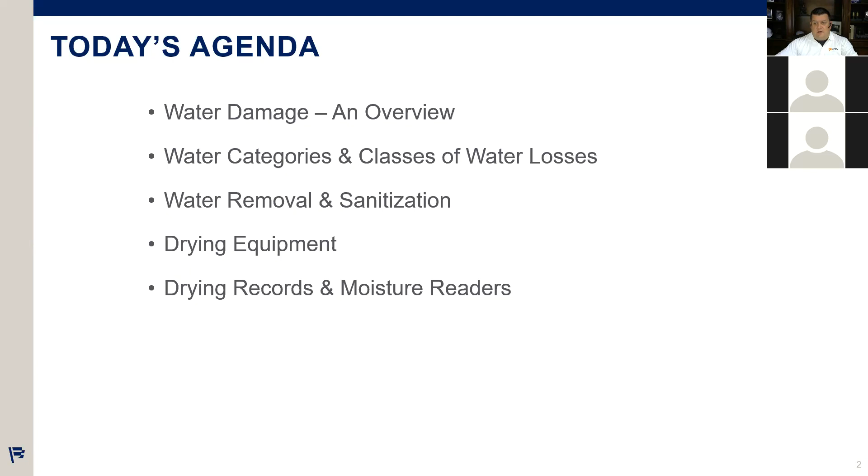So the IICRC, as Penny mentioned briefly, is the governing body that basically provides a set of rules and guides for restoration in general, not just water damage, but also fire and mold and a lot of cleaning and maintenance actually in commercial facilities, which some of you may be familiar with. So it's the Institute of Inspection, Cleaning, Restoration, and Certification.

And what we're going to focus on today is a document they produce called the S500, which is a professional standard for water damage restoration. This is recognized by ANSI, which is an international governing body. And this standard is widely accepted across North America, Western Europe, Australia, New Zealand, about as close to global as you can get when it comes to water damage.

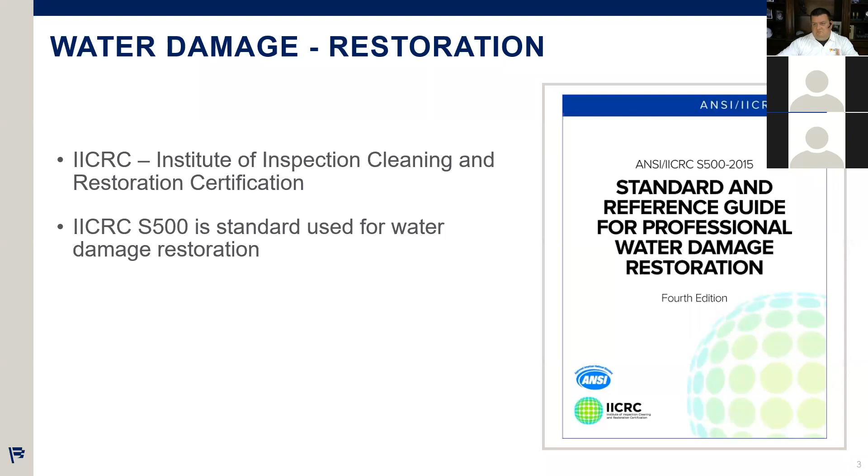So when I talk about classes and categories of water and rules and why we do things, it's not because this is how Jim does it. It's not that this is how First ONSITE does it. This is the internationally accepted method and the internationally accepted guidelines. So it's the rule book that we all follow in the water damage business.

So step one is understanding the categories of water losses. So we divide all water losses or floods or water escapes, whatever terminology you like to use, into 3 basic categories. Now, these categories are determined based on where the water came from and what sort of risk that water poses both to the structure and to human health and occupation.

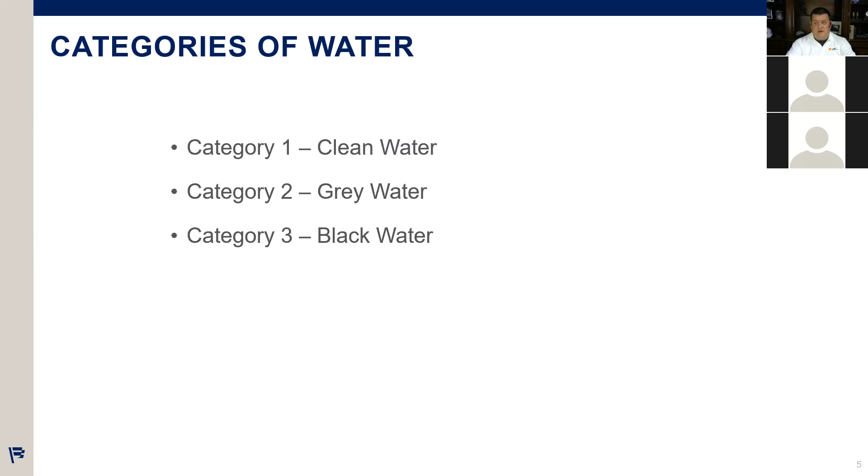So obviously the 3 basic categories here, 1, 2, and 3. And in layman's terms, which we don't use in the standard anymore, but it's easier to understand, clean water, gray water, and black water. The reason we don't use those terms anymore is they're very deceiving, and you'll see what I'm talking about in a second here.

So category 1 water losses, these are probably the most prevalent and the most regularly encountered by facility operators and managers. And this is a water escape that originates from a clean source. And when I say clean, really what I mean is potable or drinkable. This water does not pose any sort of substantive health risk. And this water normally comes from, again, potable or drinkable supplies.

So water supply pipes to things like sinks and tubs and things like that. Overflows of sinks, very common in commercial environments, or leaky taps on sinks, things like that. And really the message here is that it's about as close to drinkable water as we can get.

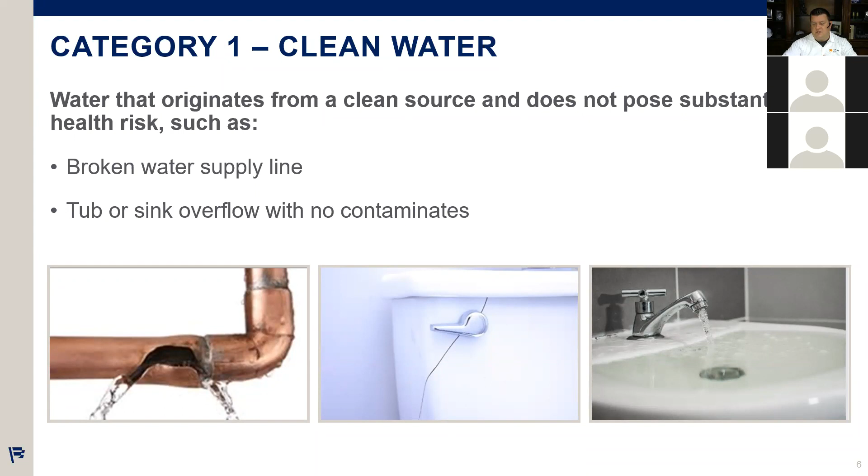Category 1 water losses or clean water losses can deteriorate into category 2 or category 3 losses for a number of reasons. So when I say deteriorate, I mean get worse, right? So we have this nice little sink overflow, there's a puddle on the floor, no big deal. We clean that up every day in our house. We clean it up every day at work.

But if that water loss then travels from floor to floor, so if your sink overflows on the 3rd floor, goes down to the 2nd floor, now it's passed through all that building material, it's going to deteriorate to a category 2 loss. Same thing if it goes from room to room to room, things have gotten worse, right?

Any mixing with soils. So even if it's clean water, if it runs through a big pile of dirt on the floor, it's not clean water anymore, right? I mean, a lot of this seems like common sense, but in the moment when you're ready to deal with it, it might not be so common sense.

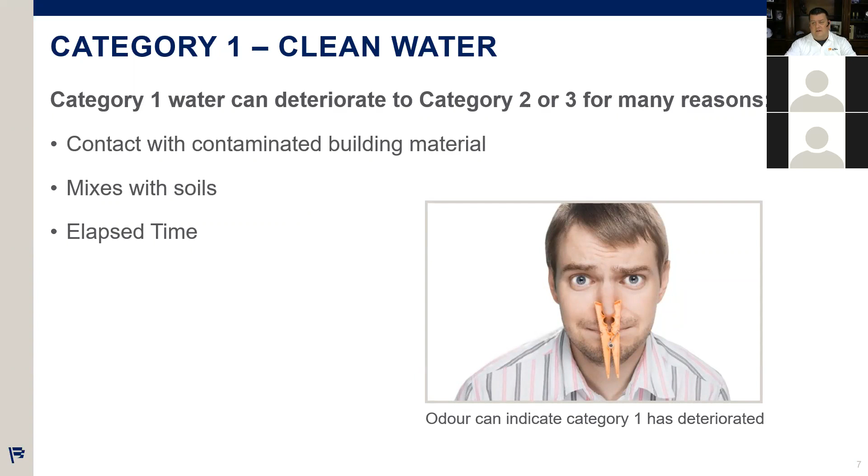The other really big thing is elapsed time. So a sink overflows on the third floor, stays on the third floor. It's a puddle. Maybe it's got the cabinet a bit wet or the bottom of the wall or something. And we go, I really don't have time to deal with this right now. Let's wait till tomorrow. Well, tomorrow it's a category 2 water loss, and the sort of cleanup measures that are going to be required and the precautions are going to be a lot more than they are today. So time is of the essence, and hours matter when we talk about these things.

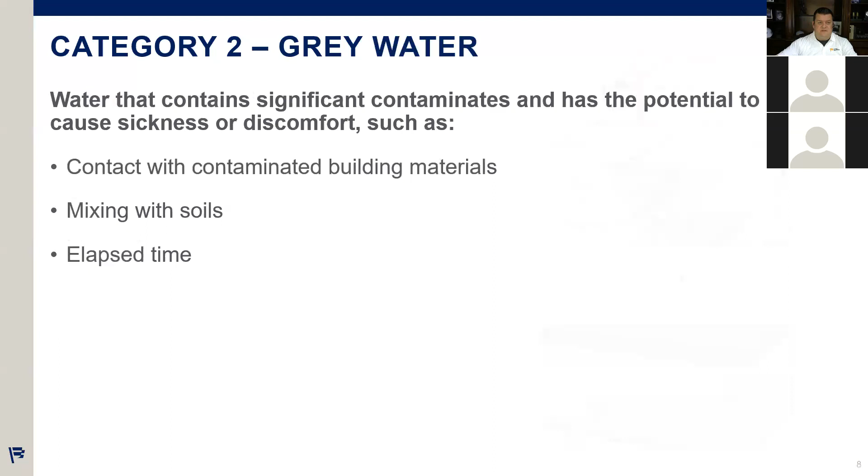Category 2 water losses, or losses that start out as category 2. Now, this is water that contains significant contaminants and has the potential to cause sickness or discomfort in people. This can also deteriorate, like I mentioned before, if it lasts for 24 hours. So if the water's sitting, or if it passes through building materials, or mixes with soils, again, if it's a really dirty floor or something like that. So common sources of category 2 water losses, where these things start out.

One of the most common is discharge hoses from washing machines and dishwashers. Now, a lot of people say, well, I clean my dishes or I clean my clothes in that machine. How dirty can it be? Well, this is the hose that takes the water after it's done that cleaning. So if I take that hose and I fill a mug up with it, are you going to drink that water? The answer is probably not. It's pretty gross looking. So that's not clean water anymore. It's a category 2 water loss and has to be treated as such.

Another very common one in our industry for building operators and managers is discharge from fire suppression systems or sprinkler systems. Anyone who's seen one of these things go off, the water's nasty. It is not clean, okay? And we have to treat it as such. Another very common one is seepage through foundations or through the building envelope. So this is water from the exterior of the structure that's penetrated either the foundation or the building envelope, being the walls, doors and windows, or very commonly ice damming through the roofing system. The reason that's treated as category 2 water is, again, because it's passed through those dirty building materials. So it's no longer clean.

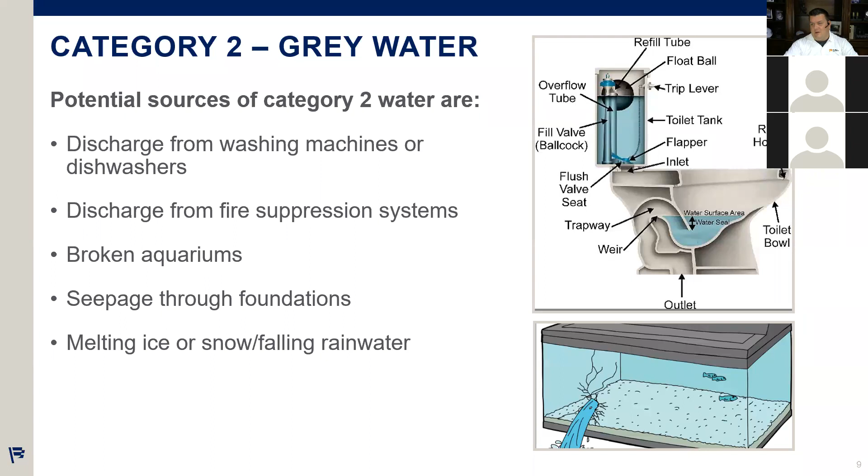Another interesting one that's on the slide here is a broken aquarium. I like to call that one category 3 or really dirty water because we all know what the fish are doing in there. So I'll leave it at that.

Category 3 water losses. This is water that's grossly unsanitary and potentially contains pathogenic agents such as gram-negative bacteria and viral contaminants. There's also the potential for chemical contaminants. And the reason all those contaminants are in there is, number one, it usually comes from the sewer system. We all know what's in there. Now it's in your building. It's really gross. It's dangerous. It's going to cause a lot of damage. There's going to be a lot of stuff required to clean this up properly.

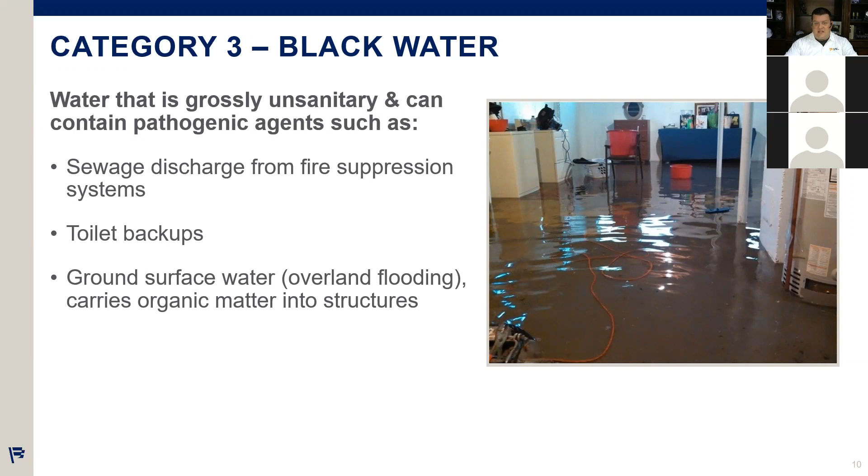And then, of course, the third place that we can get a category 3 water loss from is something that started out as category 1 or category 2 and got ignored for a number of days or went undiscovered for a number of days. Anytime water sits, and we've all seen this, for days or worse, weeks, it gets pretty nasty and it gets pretty dirty, and it really has the potential to cause a lot of health concerns. So this has to be treated very seriously, with health and safety always being number one. We need to be very careful going charging into these things.

Building operators are almost always guilty of this. They see water, they see a problem, they go charging into it. And I get it. I mean, at one point I was the same. The problem is you go charging into this water in your running shoes, or worse, less than running shoes, and you can get really, really sick. I've seen people get some really nasty bacterial infections. So you really need to stop and take a minute and protect yourself before you get in this.

As we've all learned through COVID, digital ocular contact or hand to eye contact can be a real method of transmission for bacterial contamination or viral contamination. So the full face really helps the guys from touching their face just by accident, not thinking about it. I'm going to do it 57 times while we talk here, probably. And everybody does it. And I think this whole Zoom world has really shown us that this is a real concern.

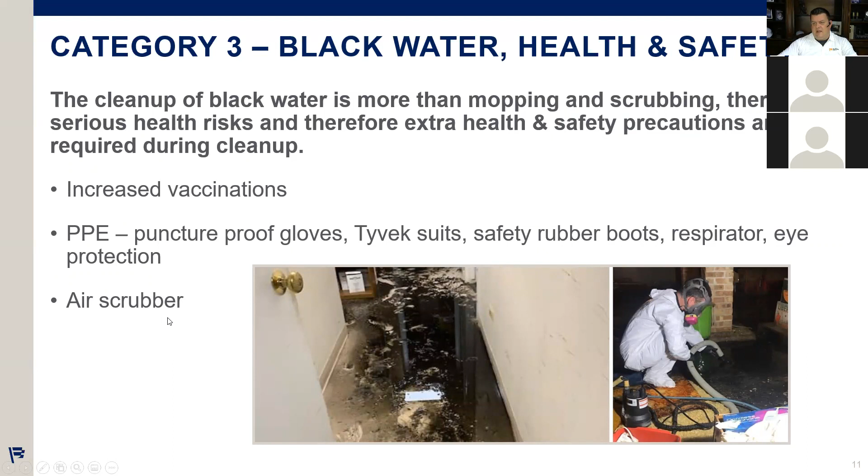You're also going to see us use a lot of air scrubbers or air filtration devices when we do this sort of cleanup. And what that does is help mitigate any risk for any contaminants that potentially become aerosolized or airborne during the cleanup process.

As I touched on briefly, the time effects on these categories of water are really critical. And the response to any water loss is critical. Hours matter, literally. This thing happens at 5 o'clock and you're trying to go home, or it's your kid's birthday or whatever. You need to deal with it right now. Hopefully that means you can just make a phone call, but at the same time, it needs to be dealt with, because tomorrow it's going to be way more money. It's going to be way more downtime and way more problems.

The other thing that's really critical to keep in mind is that the recognized standard is that under ideal conditions, within 48 hours of water exposure to building materials, mold can begin to develop. So if you have this little sink overflow and it seems like no big deal, it's Friday, nobody wants to deal with it, you wait till Monday. By Monday, it may be moldy.

When things go moldy, the price skyrockets, the downtime skyrockets, and the amount of effort on your part and everyone's part to get that restored skyrockets as well. So time, and potentially temperature also, the warmer it is in the building, the faster mold will grow. Time and temperature are definitely the enemy here, and cranking the heat up is not an answer.

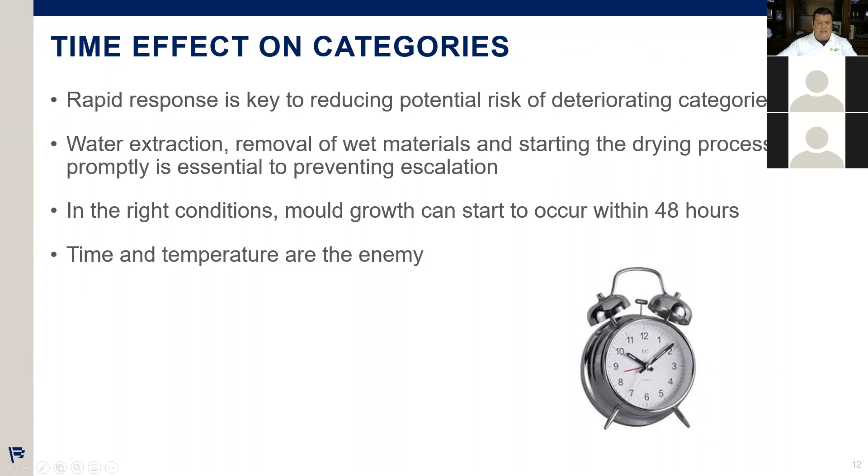So categories of water losses, like we talked about before, is where the water came from and what sort of risk it poses. So now we're going to talk about classes of water damage, and I recognize this is a bit confusing. Category, how dirty it is. Class, how we're going to respond to that loss and how we're going to clean it up. So there are 4 basic classes of water damage restoration, maybe is a better way to put it.

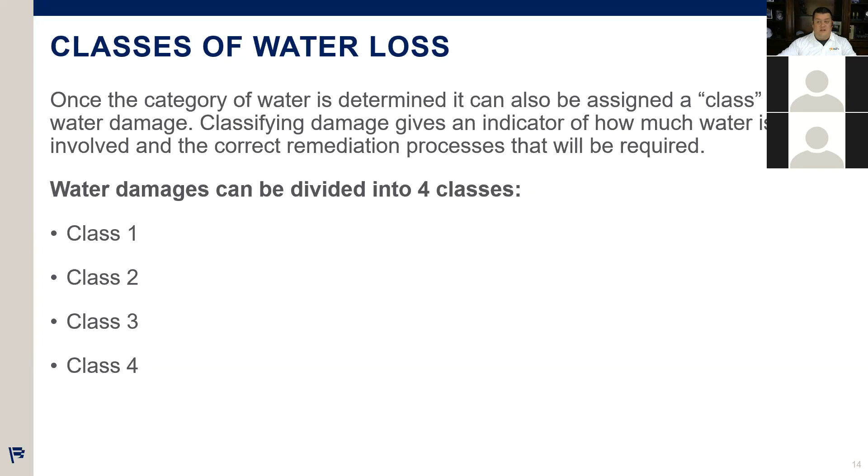So a class 1 water loss is sort of what we've been talking about to date here. It's your sink overflow, it's a puddle on the floor, and really is defined as only impacting a portion of a room or a small area, generally on the floor. Again, you guys clean this up all the time. It's pretty straightforward. Mop the water up, make sure it's dry, sanitize the area, move on, right? No big deal.

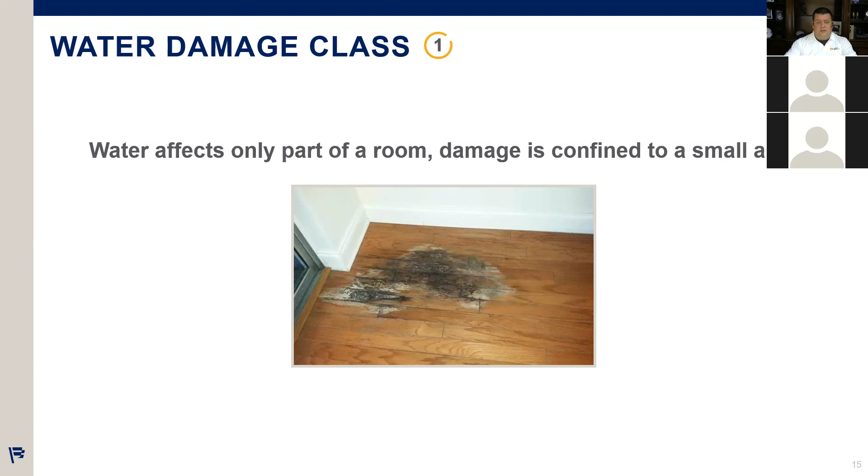So class 2 water damage, things have sort of escalated quickly, as they say, and gotten a little bit worse. And this is water that's affected the entire room now. And it started to wick up the walls. So when I say wick up the walls, people say, well, it's just the carpet that's wet.

Probably not. Drywall, by its very nature, gypsum wallboard, is a highly desiccated material. So when the water's just along the floor, just along the carpet, as soon as it touches the very bottom of that sheet of gypsum wallboard, it's going to wick up through capillary action, basically, or similar to capillary action.

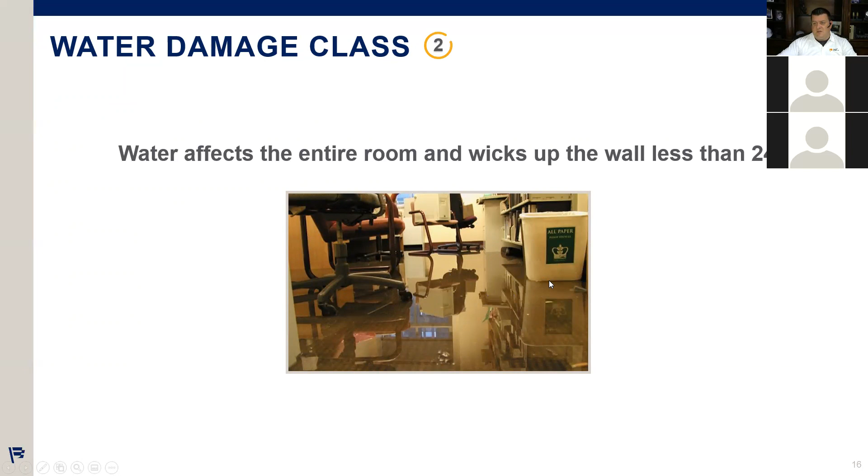So even though the water is only at floor level or the carpet's wet, that moisture will begin to wick up the gypsum wallboard. In fact, in the water damage you see in the photograph here, within 3 or 4 hours, moisture is going to be 6 to 12 inches up that wall every time. That's going to necessitate either drying it out or doing some partial removals. There can be any number of things required now to clean this up. So generally, once a whole room is wet like this and it's reached the base of the walls, things are worse, and you're probably going to need some help cleaning it up.

A really key point about ceilings in commercial buildings is what's called the interstitial space. That's the gap between this ceiling and the floor above it. Inside that interstitial space in most commercial buildings is a lot of mechanical systems, and many of those systems have insulation on them that can be impacted by water damage. We can also have spray-applied fireproofing in this area that can be impacted by the water. So this becomes a pretty complicated deal to clean up and a fairly complicated issue to repair. Again, if it's gone from floor to floor and room to room to room, this is definitely where you're going to want to consult a professional.

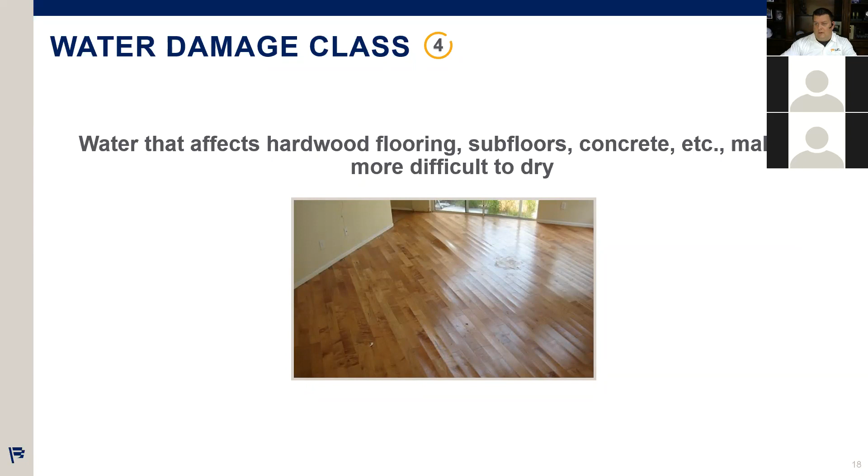The other thing that falls in Class 4 is concrete. Concrete is an interesting material — it very readily accepts moisture or soaks water up, and then it really doesn't like to let it go. So getting concrete dry is a very technical process that requires a lot of know-how and specialty equipment. If you don't get that concrete dry, especially concrete slabs, say in an apartment building, and you install new flooring on it — number one, you're going to have no warranty per the flooring manufacturer if you actually read the details, and number two, that floor is likely not going to properly adhere. So it's really critical that the concrete slab is dry before you install any new flooring material, or you're going to end up doing it twice, or worse, more than twice. Concrete is really a specialty thing, really difficult to deal with.

So we've had our flood, right? The sink's overflowed, it's gotten into a few offices, and it's gone floor to floor. Now we're going to talk about water removal and cleanup. Physical removal of the water is always step one. So when I say physical removal, I mean pumping it, squeegeeing it down the hallway and down the stairs, mopping it up — whatever we've got to do to physically remove that water from the building.

Physical removal of the water — pumping, squeegeeing, mopping, etc. — is up to 1,000 times more efficient than evaporation and structural drying. So for every liter of water we can get out of that building physically, it's going to make the rest of the process that much faster and that much more efficient, and minimize your downtime.

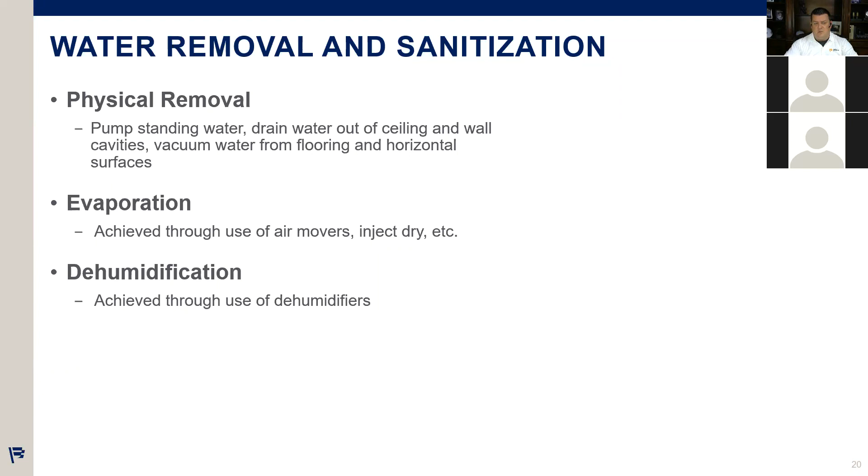So we always want to extract as much physical water as we can possibly can. Once we've done that, then we're going to install a structural drying system. This can be air movers and dehumidifiers and potentially other pieces of specialty equipment to get the building back down to its equilibrium moisture content and get it dry so that you can then do repairs.

So we've got the water out, we're ready to set up our equipment. Generally speaking, with these sort of class 3 water losses where water's gone floor to floor, we're going to have to do some selective demolition. We're going to have to remove some drywall, and probably some flooring.

Before we can remove any drywall or any ceiling tiles, we need to check whatever you've got in your province. In Ontario, it would be called a DSS. In British Columbia, it's called an HMI. In Atlantic Canada, there's a variety of terms for this. Basically, it's a hazardous material inventory for your building. And that's really identifying the things we're looking for during water damage restoration: asbestos, lead, and potentially mercury. So we need to know before we're cutting that drywall out, whether it's got asbestos in the joint compound, whether there's lead paint present, things like that.

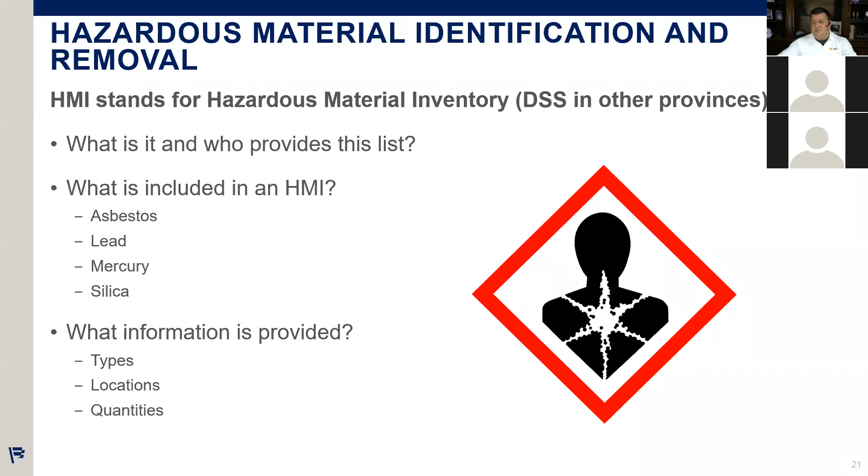If you don't have a hazardous material inventory or survey for your building as part of your corporate policy, then we'll work with you to get some samples taken and verify that. Again, we need to make sure that these materials are properly and legally handled. Just because we're in a hurry and it's wet doesn't mean we can go breaking the rules.

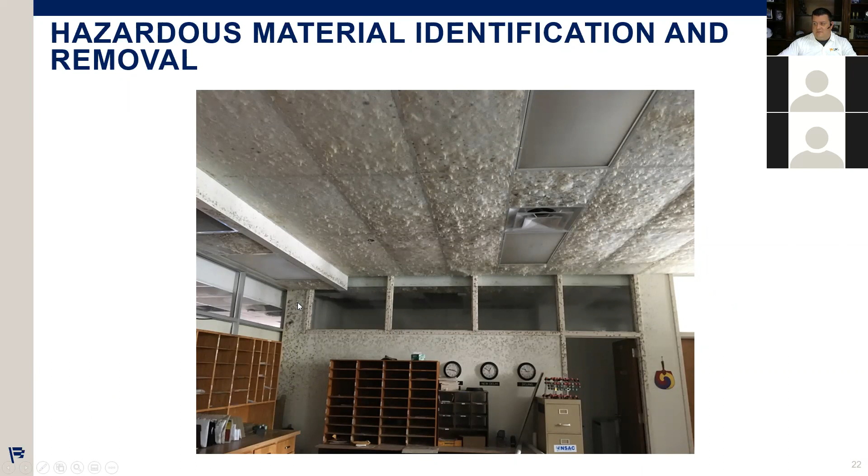Here's a picture of some super moldy ceiling tiles for anybody that's interested in these ones. So again, hazardous material identification, right? We're identifying some mold right here. So obviously this is going to have to be treated differently than your standard sort of selective demolition for clean water. It's going to require probably a full-blown abatement, right?

Now, when we talk about hazardous material abatement, we've had our flood, we've done our testing or our sampling, or we've consulted your inventory for your building. And unfortunately, we've identified some asbestos in the joint compound. So now we're going to have to conduct an abatement as opposed to just our standard sort of selective demolition.

There are three major categories of asbestos abatement, which are high, moderate, and low risk procedures. Most of these things are going to look like what you've seen in the past when it comes to abatement: plastic chambers, decontamination chambers, negative air, specialty staff, specialty equipment, all those things.

Generally speaking, we're going to have to file some sort of notice with the province, especially if we're doing high risk abatement. The workers who are going to be required to do this are skilled, experienced people. You can't just use general laborers or your own staff or our water damage people to do this. They're highly skilled and experienced, and generally licensed, depending on the province that you live in, to conduct asbestos abatement.

We're also going to help you and work with you to get a third-party environmental consultant who's going to conduct background sampling before, clearance sampling after, and any other air sampling or surface sampling that's required as part of the abatement. The other important thing to note with asbestos is that the disposal of asbestos-containing material is highly regulated in Canada and generally highly expensive. So it's a lot more money to throw that drywall away if it's got asbestos in it as compared to not having asbestos in it.

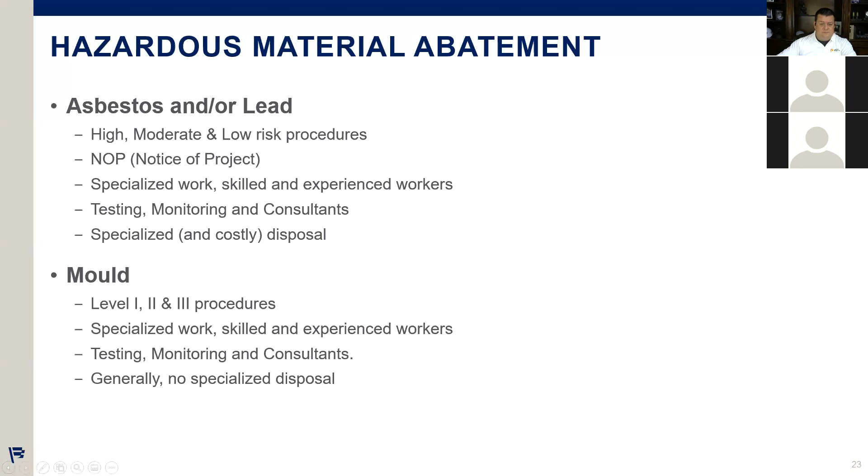So moving forward, if we've had your water loss and we've checked the DSS or the HMI and done our sampling, and there's no asbestos and there's no mold, that's the best case scenario, right? We can move forward now. So what we're going to consider are the drivers of whether we're going to remove building materials or try and dry them, save them, and do repairs.

What we need to consider, number one, is cost. Is it going to be cheaper to just cut a whole bunch of drywall out instead of trying to dry it and save it, or vice versa? Depending on your situation, it may go either way.

The other driver, obviously, is health and safety. If it's a category 2 or category 3 water loss, the vast majority of those wet porous building materials are going to end up needing to be removed. Things like metal framing, as you see in the photograph here, can almost always be cleaned and saved. Ceramic tile floors, like in the photograph, can always be cleaned and saved.

The other thing we're going to consider is downtime. Depending on the nature of your business or the occupants, maybe time is going to outweigh cost, and we just need to be open, even if it's going to cost a bit more money. That's going to help drive our decision making as to whether we're going to remove something or try and save it, sanitize it and clean it.

The science of drying has come a long way in the last 25 years or so. We can dry and save almost anything if it's safe to do so. The question is, again, is it worth it time-wise? Is it worth it from a monetary perspective? Or potentially, is there some sort of historical or sentimentality attached to it?

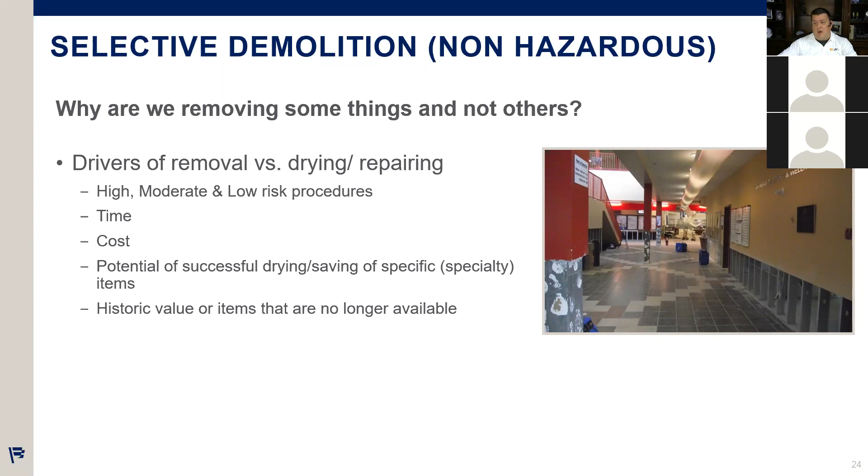And that should be an active discussion between the restoration professional and yourselves as building operators and managers.

So cleaning and sanitizing: we do our selective demolition, and then we're going to do a really thorough cleaning and sanitization of the whole area to kill anything that may be left behind. This is bacteria we're talking about, viruses, anything like that. We want to make sure all that bad stuff is gone.

Now, what I missed a little bit earlier on is right after we do our water extraction, we're also likely going to lay down a coat of sanitizer at that point as well. The reason we do that, and the reason we sanitize more than once, is on really nasty sewer backup losses we may do this 3 or 4 times.

The reason we're doing this is we're trying to reduce what's called the bacterial load on the project—the amount of gross bacteria that's in the building. Every time we lay down a coat of sanitizer, it's killing more of it. A lot of times, especially when it's really nasty, one application isn't enough to kill it all, so we're going to do this more than once. On clean water losses, maybe only once, but category 2 and category 3 water losses generally 2 or 3 times.

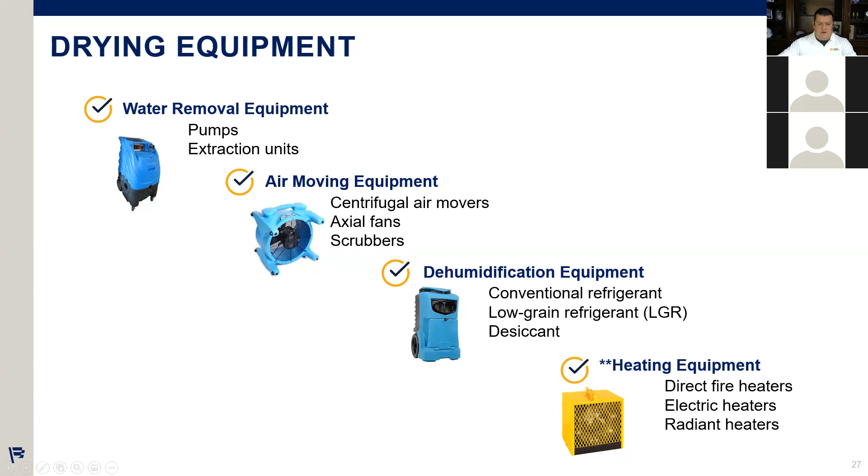Talk a little bit more about dehumidifiers. As I mentioned, standard refrigerants versus low grain refrigerant dehumidifiers. These standard refrigerants, like the Dri-Eaz 1200 here, are basically all we had when I started in the business. We don't generally use them anymore. The reason we don't use them is they don't function very well in cool temperatures, at 68 degrees, about 19 centigrade. A lot of times when we're doing this work, we've had to remove some insulation from the walls, so it's cold in the room, not freezing, but cold. So these don't work.

They also don't provide very dry air. I'm looking for air coming out of that machine that's sort of 30 to 35 grains per pound, which is a measure of how much water's still in it. And that's going to help me get that building really dry, and these just don't do it.

Now, a real key factor: if you're going down to your local rental center, Battlefield or Hertz or whatever you got in your town, and you're renting dehumidifiers, this is what you're going to get — these standard refrigerant dehumidifiers. Low grain refrigerants are what all professional water restorers are using now, or should be using.

These are a lot more efficient units. They remove a lot more moisture per hour from the air, and they also make that air a lot drier when it's coming out the other end. The technology is really moving forward quickly on these. They draw a lot less power than they used to, are quieter than they used to be, and they remove a lot more water. So professional water restorers are always going to use these low grain refrigerants in today's day and age.

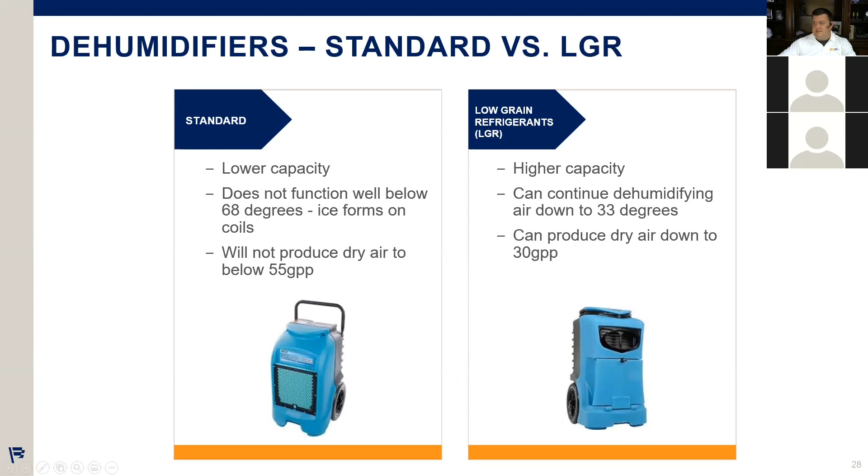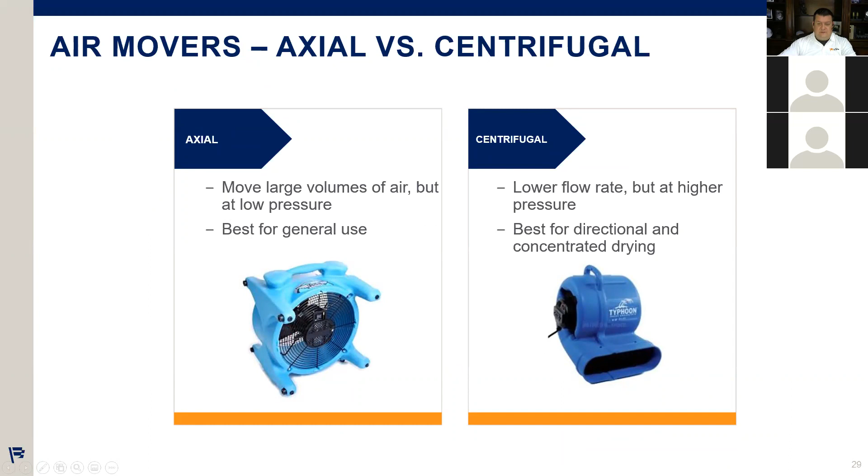So how we're going to do that is we're going to blow air across that 2x4 with an air mover, like we see in the photograph here. What that air is going to do is add heat energy and allow that moisture in the wood to change state from a liquid to a gas and evaporate up into the air. It's a very similar principle to when you put your arm out the window of the car and it feels cooler. The reason it feels cooler is there's moisture evaporating out of your arm into the air, and that latent heat required for that change of state has now made your arm feel cooler. So that evaporation out of that 2x4 is also going to make the 2x4 slightly cooler — an interesting fact we'll get to in a minute.

But that water is now leaving the 2x4 and going up into the air in the room. So now we've got the water up in the air, and now we need to get the water out of the room. So what we're going to do is suck that air through the dehumidifier, and through condensation, that dehumidifier is going to strain the water out of the air and into the tank in the machine. Then the machine's going to pump out the water in the tank, down in the bottom here, down a little hose and down the drain, and therefore out of the building. Then out of the back of the dehumidifier is going to come hot, dry air. That hot, dry air goes back in the room. The air mover blows the hot, dry air across the 2x4 — evaporation, dehumidification, cycle continues.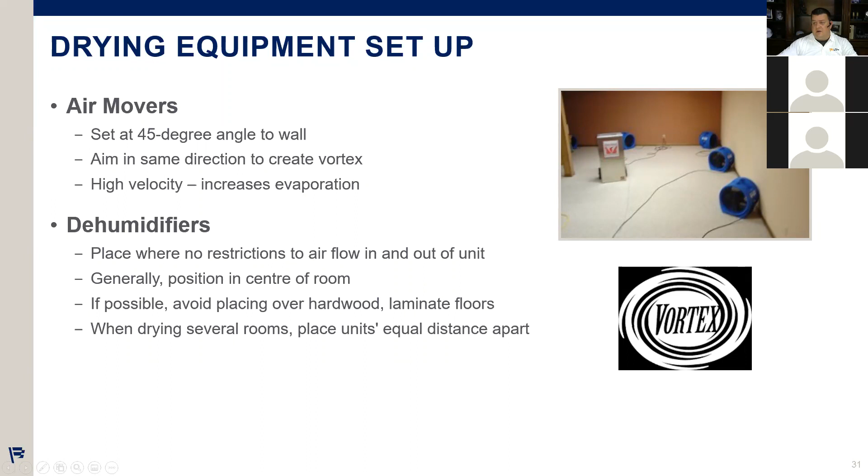And we're also going to avoid putting it on any sort of really sensitive flooring in case there's a leak or a mishap with the machine. So we're generally going to try not to put it on hardwood floors. If we have to, we have these emergency trays for them in case they do leak. They're also going to be placed equidistant across a larger room. So if we've got a big, bullpen style office, we're going to spread these out throughout that large area. And the dehumidifiers are sized as per the cubic footage of the room, just as a point of fact.

So while we're doing this structural drying, you're going to notice that a couple of our technicians are going to be around after setup, taking a whole bunch of notes. Now, this is a bit of an older form, but it's easier to explain. A lot of this is done on our tablets now, but we're going to be recording a lot of data during the setup and then during the drying process. The reason is it's going to create a daily record of the drying process from start to finish to prove that, yes, indeed, the building was wet. We made it drier each day, and now it's dry at the end.

And we do that so we can provide you those records in case you have any disagreements with tenants or occupants, potentially employees or unions. This provides a very valuable record that you can provide to them to say, look, we had a water loss, we hired a professional, and they mitigated it as per the internationally accepted standards, and here's all their records. This can be really important down the road, for a simple bit of time for us to do that for you. So the techs are going to come back every day. They're going to take more measurements.

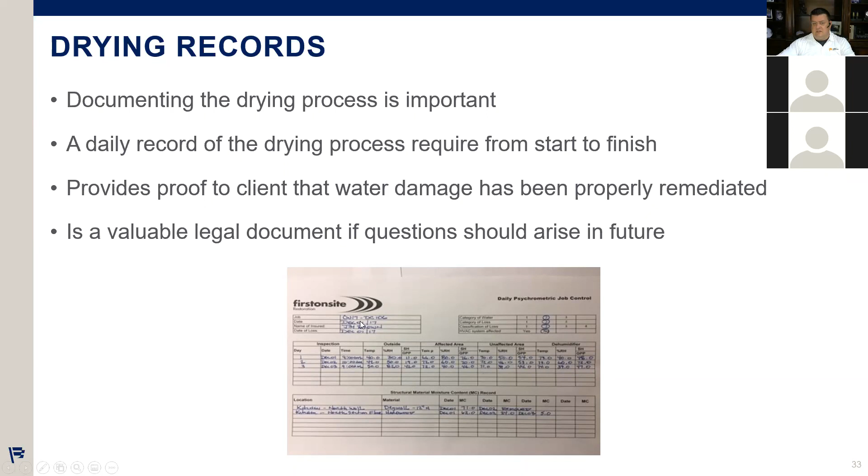So a lot of data that's being collected. Now, to collect that data, we're going to use a variety of instruments to measure moisture levels, both in the air and in the building materials. So when we're measuring the air, we're going to use something called a thermohygrometer.

This is a multifunction meter that measures things like dry and wet bulb temperature, relative humidity, specific humidity, which is GPP in the slide here. And that's specifically how much water's in the air.

Problem with relative humidity, like you hear on the news, and this is a bit of a tangent, is that it's relative to temperature. So when somebody says you have to keep the humidity in your building between 30 and 50%, that 30 and 50% is relative to the temperature. So 30% humidity at 26 degrees centigrade is really, really humid, actually. But 30% humidity at 8 degrees centigrade is really, really dry. So it's a very deceiving number.

And as professional restorers, we want to know actually how much water is in the air in the room. And we use a measurement called specific humidity, or grains per pound, which is an imperial measurement of how much physical water is in that room. I won't get into the math, but that's the difference between the two.

We're also then going to use a variety of moisture meters to detect moisture in building materials. So these are, generally speaking, conductivity based, either penetrating or non-penetrating moisture meters that we're going to use. These penetrating ones are the ones with the pins on the end. Non-penetrating usually have some pads on the back.

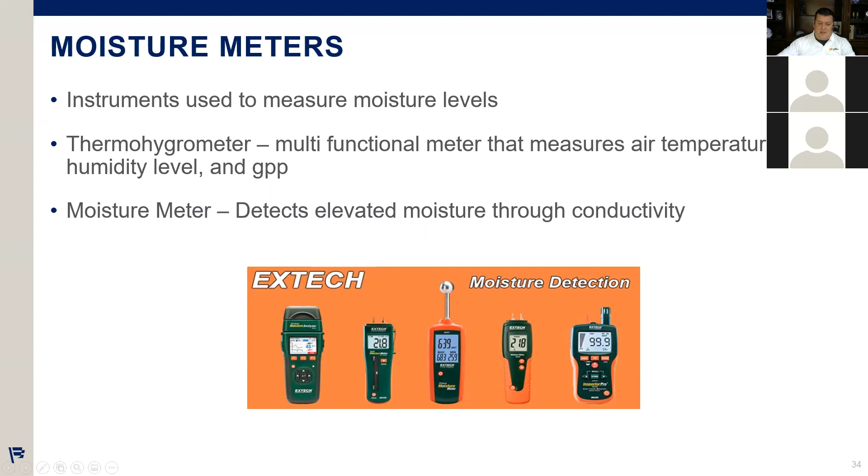So when we create these drying records, like I talked about, it's really critical that we're taking moisture content and material readings, or how wet the drywall or the wood framing is, or the concrete, whatever it is we're trying to dry. So we're going to notate the location and the type of materials when we took the readings.

And then what we're going to do is we're going to locate a portion of your building that was never affected by the flood. And the reason we're going to do that is we want to know what the normal or background or ambient moisture content of those materials are. Drywall, for instance, in Moncton in the summertime is potentially going to have a moisture content in the neighborhood of 10 to 12%. That's going to be dry or ambient before the flood.

That same drywall in downtown Calgary in the summertime is very likely going to have an ambient moisture content closer to 6 or 7%. So there's no magic number for dry, and a lot of things can influence that, from potentially shadows from another building on your building, sun exposure, the performance of the HVAC system, the performance of your windows and doors, a lot of things that can influence ambient moisture content.

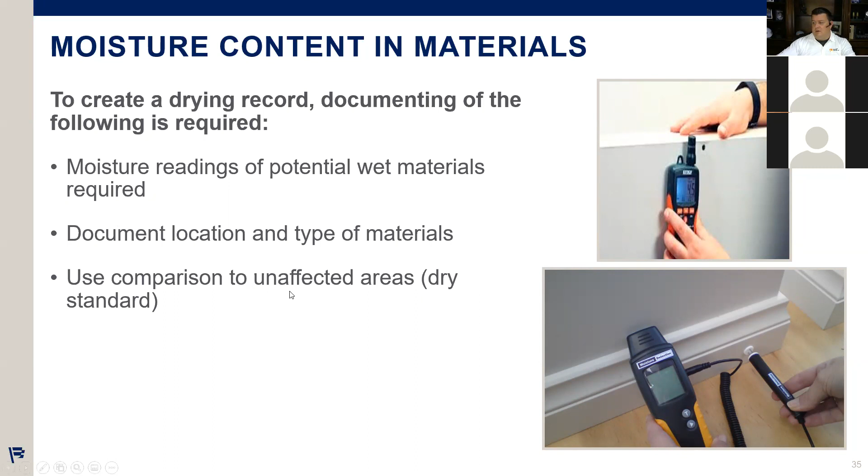So we're always going to take those background readings to establish what is dry for your building at that time of year. And then we're going to try and get the impacted or wet materials back to that ambient moisture content through the drying process and the restoration process like we've talked about.

When we talk about thermal imaging, and everybody wants to talk about this, it's sort of the new interesting thing for a lot of people in building management, and for us in restoration as well. The price of these things has come way down, so everybody's really interested in them now.

I mean, I can tell you, when the company that I worked for bought our first one in the very early 2000s, it was $31,000. It didn't work real great, but man, it was a huge leap then. You buy these things now for a couple of grand for a really good one. You can buy a crappy one that doesn't work very well from a retail store for 300 or 400.

Now, the really important thing about thermal imaging is that it's exactly what it's called, thermal. So it sees temperature. You cannot see water or moisture with thermal imaging. You cannot. It's physically impossible. What we as restorers look for with thermal imaging is what's called evaporative cooling.

Now, it's entirely possible that this is water, that this is from a flood. It's also entirely possible that this is the winter time and there's some insulation voids in this area of the building, and that's causing those areas to be colder than the surrounding areas. So this technology really needs to be used with a critical eye and with a lot of other training involved. Just pointing at the wall and looking for dark spots, it could be showing any number of things.

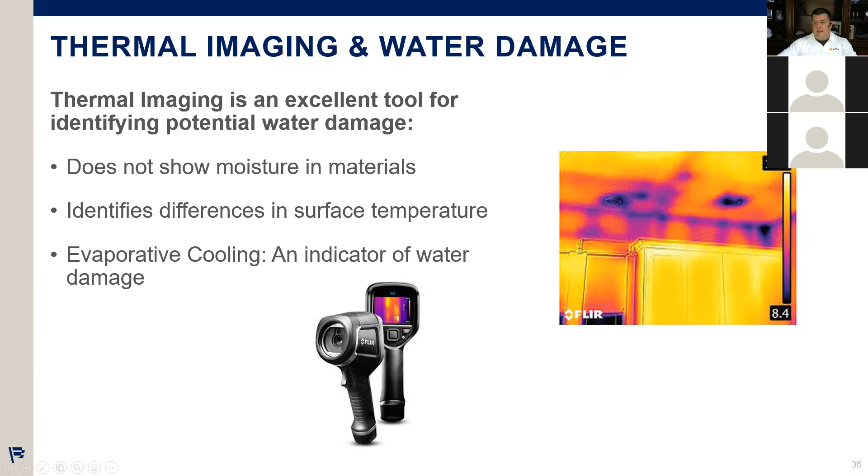And really for us, what we use it for is initially surveying a loss. So especially when we have water damage that's throughout, like I said, 15 apartments, we can now scan through those 15 apartments in a few minutes to an hour and get a really good idea about what is probably wet and what's probably not, as opposed to what would potentially have taken hours or a whole day to really diagnose before thermal imaging. So like I said, not the be all and end all, very good survey tool, very useful for electrical work in some scenarios and heat loss especially, but definitely needs to be used in conjunction with some additional training and knowledge and experience.